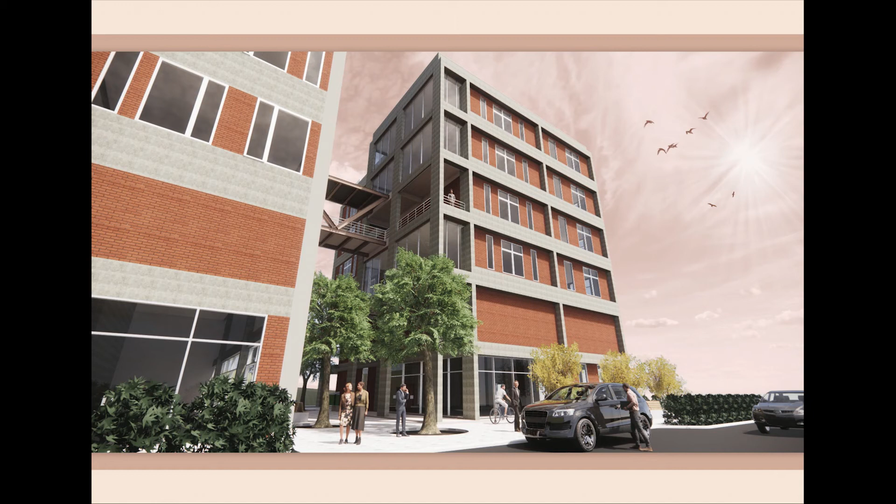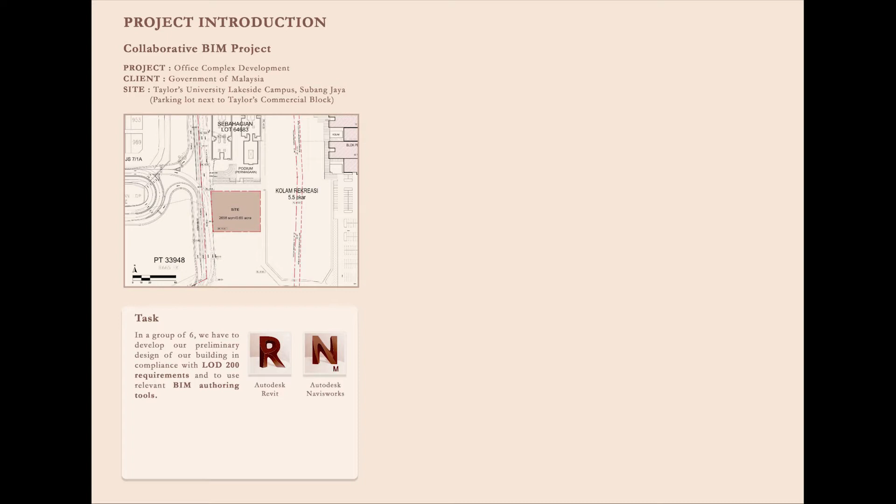The collaborative BIM project is an office complex development on the site, which is a parking lot next to Taylor's commercial block in Taylor's University Lakeside campus. Our task as a design team is to develop our preliminary design in compliance with LOD 200 requirements and to use relevant BIM authoring tools such as Autodesk Revit and Autodesk Navisworks.

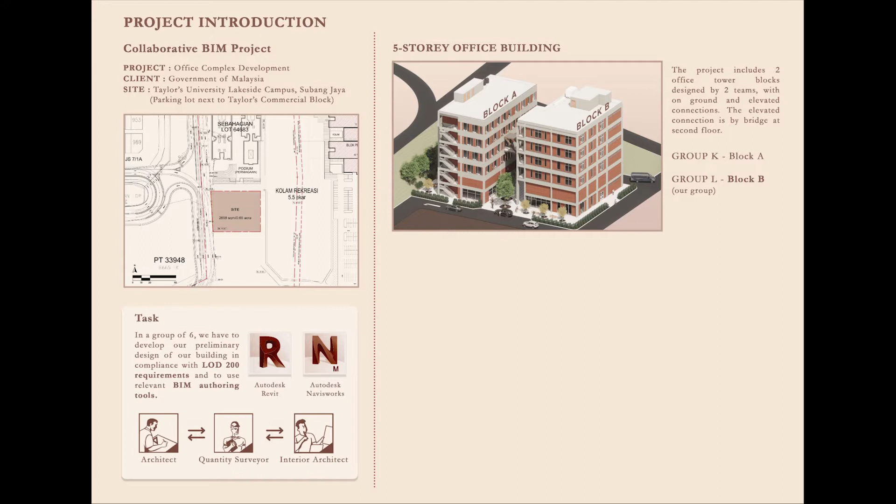The building was designed and constructed using a BIM process to allow collaboration among architects, interior architects, and quantity surveyors. The project includes two 5-story office tower blocks designed by two teams, with on-ground and elevated connection. Our group collaborated with Group K, where they designed Block A and we were in charge of designing Block B.

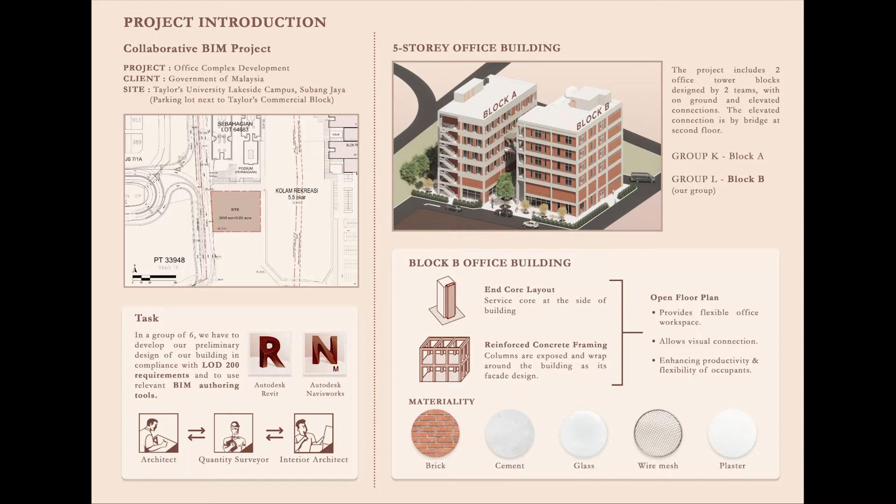Our 5-story office building implemented an end-core layout and is supported by reinforced concrete framing, which allows the building to have an open floor plan that provides flexible office workspace. Materials used in the building include brick, cement, glass, wire mesh, and plaster.

Not so long ago, building a world with harmony came with a few twists: inaccuracy, misinterpretation, misunderstanding. But times have changed. Building Information Modeling (BIM) helps each stakeholder, client, architect, expert, and end user of a project to share the same vision from design to the usage of a building.

But how different are traditional and BIM methods? In traditional methods, data and ideas are pretty unorganized, which results in time wastage. And due to the lack of collaboration and communication, the chances of errors are at high risk, followed by inaccuracy of data which can cause delays in the project and more money spent.

Without exposure to new technology advancement, it is hard to detect clash collisions in a project, resulting in a long duration for administration approval, and lastly, adding cost and time to a project.

However, using the BIM method is efficient, as data is stored on a cloud server which is then distributed for multidisciplinary collaboration with accurate data sharing. The use of technology is more engaging and flexible, as messages are simple to analyze.

The accuracy in data results in projects being able to meet deadlines, all thanks to software improving the delivery of data. It helps detect clash detection at an early stage before the start of construction. We first start by evaluating the design options.

With 3D modeling, it allows users to analyze structure and improve workflow, where changes can be made easily. With collaboration, it allows interactive testing while choosing the most efficient material choice and allows users to focus on delivering the best project possible. With delivery of the best outcome, it allows clients to engage and understand better.

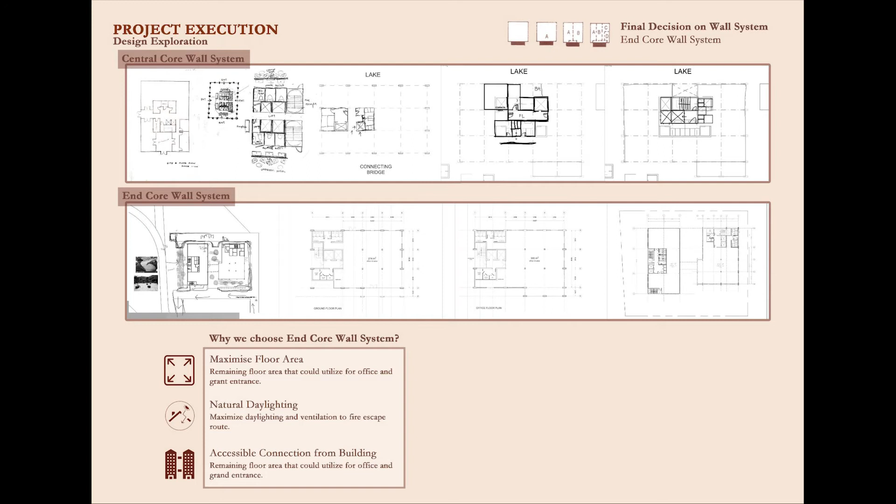As the brief requires, we decided to use an end core wall system as our service core in the office building. The reason we desired an end core wall system is due to three main concerns: to maximize the spaces, to maximize ventilation, and natural daylighting in the fire lobby, as well as utilize the floor area connecting to the next building.

In the office building, we are using exposed columns to reduce finishes cost while preserving the aesthetic of the building, reduce carbon footprint, as well as require low maintenance.

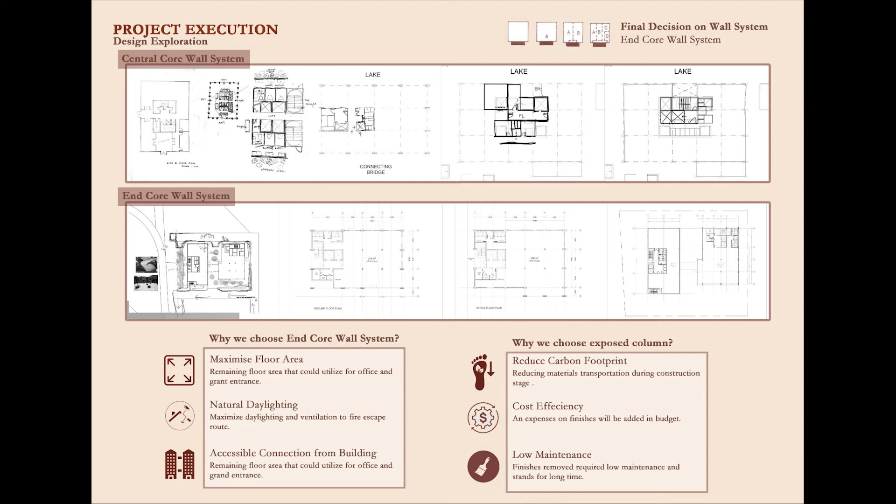The build-up process of the 5-story office block starts up with the minimum 12 depth cast in situ bored pile foundation as the substructure of the building.

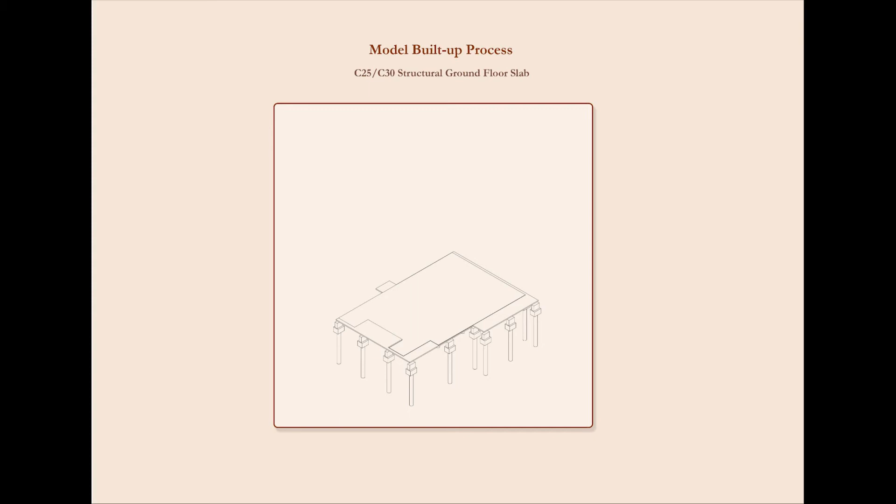Structural ground slab with concrete grade C25 or C30 as the base of the ground, 230mm reinforced concrete load-bearing wall built up. The service core of the office also acts as the core structure for support.

Reinforced concrete columns and beams form the structural frame of the building. Concrete floor slab with C25 or C30 concrete grade are laid on every level.

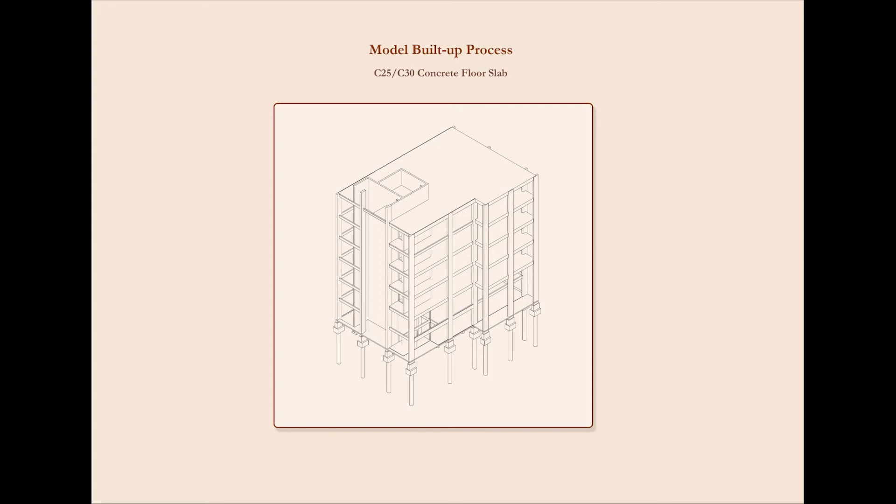Facing brick is used for the material of the external wall, with the purpose to retain the exposed texture of the brick as the building facade.

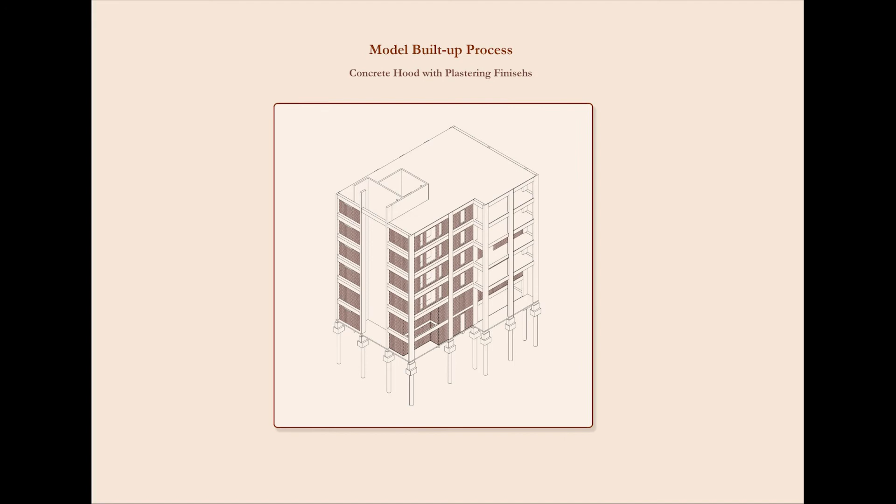Concrete hood with plastering finishes clad on the wall for aesthetic purpose. Next follows the installation of windows and doors.

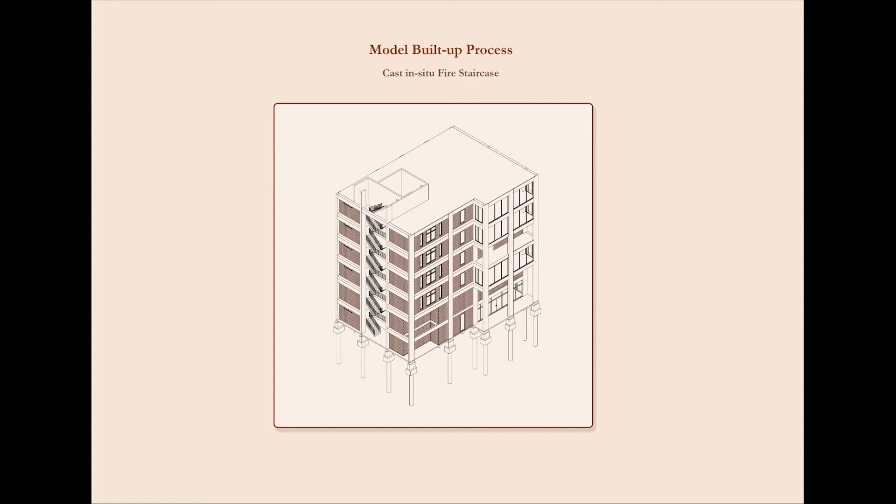External cast in situ fire staircase is located at the north end of the building as the primary escape route. Stainless steel mesh staircase cladding is installed for safety purposes and runway ventilation.

Complete with the component at roof level for service use. Steel beam structures connecting bridge connects both office blocks at third level. With the addition of vegetation and the vehicular path, it completes the environment and the circulation for the user of the office block.

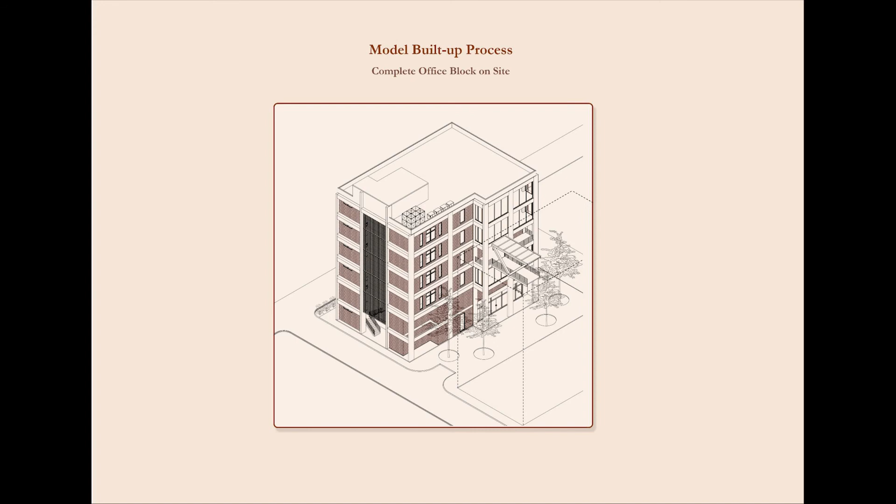The building consists of 4 main components: substructure, shell, interior, and service. For the substructure part, the foundation is made by C35 concrete piling foundation and precast concrete two-way slab with finishing for the slab.

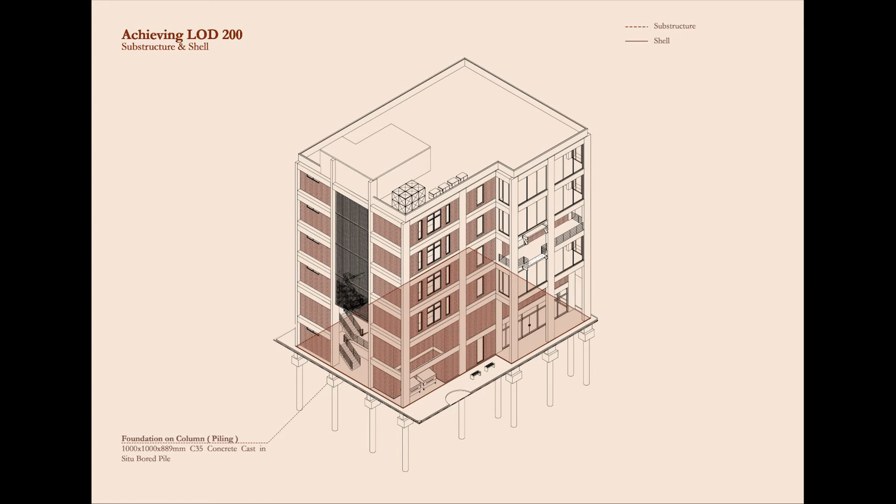For the shell, it started from the fire staircase running through 6 levels and having 5 landings with 900mm height stainless steel balustrade and railing. The fire staircase is covered by plain square woven stainless steel wire mesh with 15mm opening.

For roofing, it is made up of concrete flat roof up to 3 degrees with hidden gutter system. Exterior windows consist of double casement windows with fixed glass located at the office area, and 2-panel toilet top-hung awning windows located at the toilet.

Exterior doors are located at the main entrance, side entry, and fire staircase. Also, a 150 mm stretcher bond half facing brick wall is used for the exterior wall, with a 900 mm high facing brick parapet wall constructed above the plane of the roof.

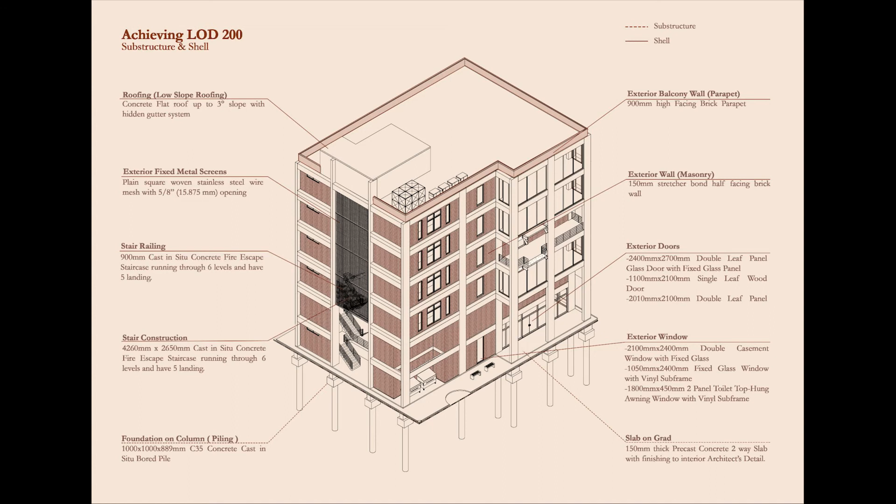For the interior part, it is made up of a 150 mm brick wall with 12 mm thick plastering on both sides to engineer's detail, and an 80 mm thick gypsum board toilet partition. Furthermore, the interior door consists of a single-leaf wood swinging door at the service core.

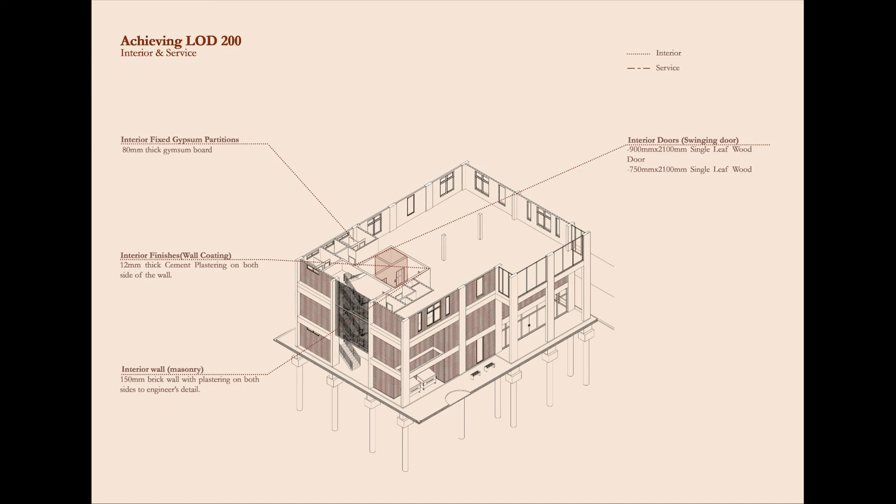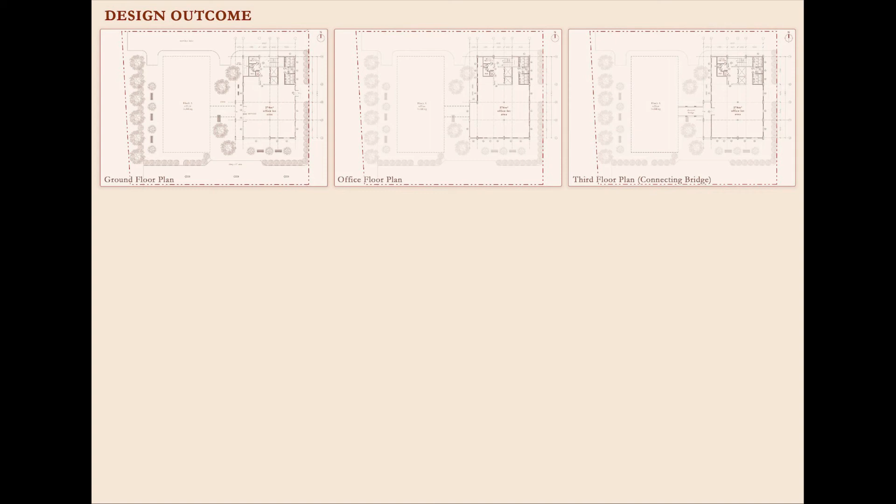The office buildings are connected along a central open plaza. The core of the building is placed at the north end to allow a more spacious and flexible office workspace. The elevated connecting bridge is located at the third floor to allow better accessibility between the two building blocks at upper floors.

The overall building height is about 21 meters, with the lift motor room located at the top of the roof floor. The ground floor has a double volume height of 8 meters, while the rest of the building above is 4 meters height. Both office blocks use the same design language for the exterior facade.

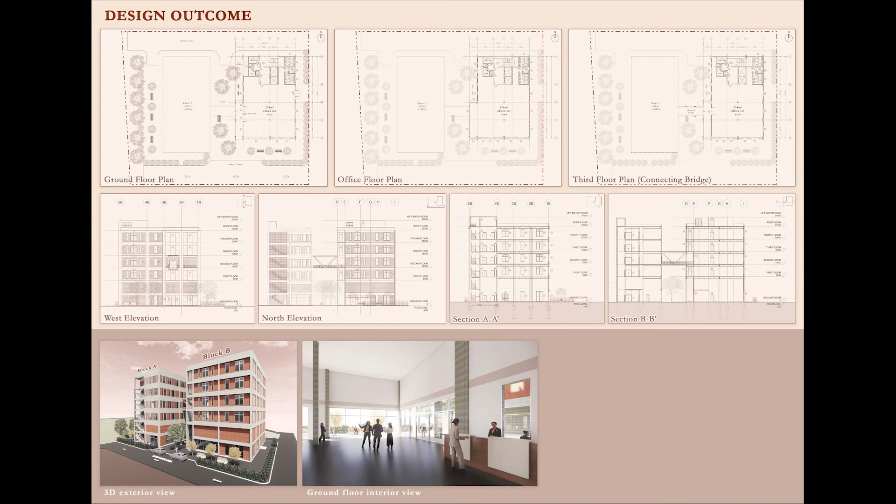The interior view of the ground floor shows the double volume height of 8 meters. This image shows the view of a steel structure connecting bridge to our building.

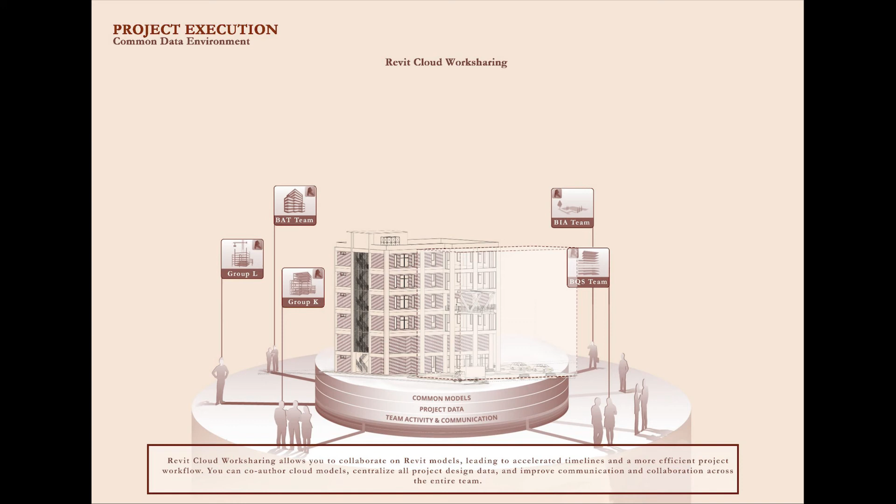To execute our project, Revit Cloud Work Sharing is used to improve the workflow and ensure our building model is in the latest version. This helps to improve communication and efficiency within the entire team.

With cloud sharing, the Synchronize tool helps to save any changes made in the model to ensure the team's building model is up to date.

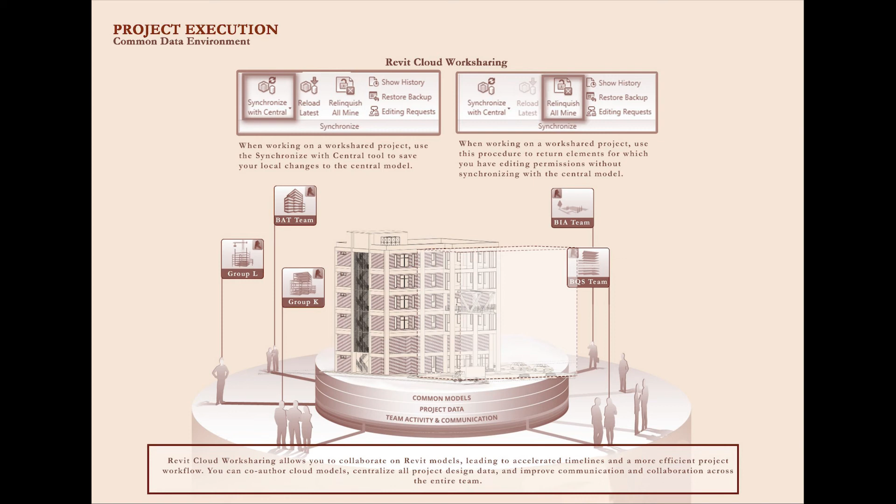Using the Relinquish All Mine tool, it allows other members to have permission to edit the central model when accessing the cloud sharing. In Navisworks and Clash Report, clash detection is a technique used to inspect any interferences in the project model.

This reduces the risk of human errors before the start of construction. In our office model, BIM modellers analyze clash reports using Autodesk Navisworks after the model is finalized and completed.

Aside from clash detection, the use of Autodesk Navisworks helps to improve communication with clients and consultants using 3D presentation techniques and models to engage better.

In the clash detection, hard clashes are detected in floor to column, ceiling to column, floor to shear walls, and beam to shear walls. These clashes are detected due to imperfections in the digital model.

However, it can be ignorable where it does not affect the construction process. Some soft clashes detected are doors clashing with walls and mullions clashing with glass, which occur due to mistakes within Navisworks.

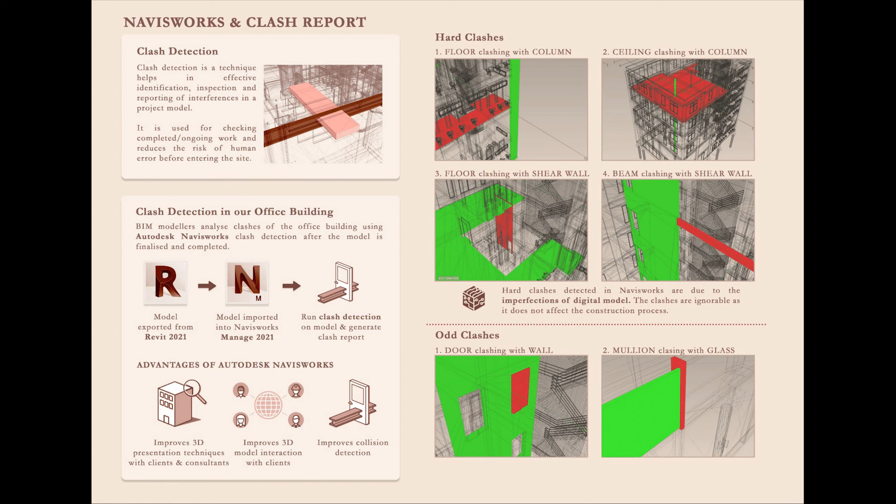In conclusion, implementing BIM in the practice workspace helped to save 50% of time in the design stage, 33% in the construction stage, and 20% in the operation stage.

At the early stage, the selection of appropriate BIM software is important to perform the task, followed by involvement and participation with trust, respect, and commitment to achieve success under the BIM environment. To implement a successful BIM, collaboration, personal commitment, motivation, and practitioner behaviors must be considered to increase the diffusion of BIM.

In the current Malaysia construction industry, we face challenges in terms of project delays, cost overruns, and low quality, which urge to be solved. Despite the acknowledgement of BIM, practitioners are reluctant to adopt the practice.

However, construction players believe that BIM should be enforced to produce a desirable outcome during a project. Government policy is viewed to be in line with construction stakeholders' perceptions of the value gained by BIM implementation.

But in the current Malaysian construction industry, CAD-based workflows are heavily relied on, where BIM implementation somehow increases the difficulty in shifting the company's workflow from conventional construction practices into BIM-based technology.